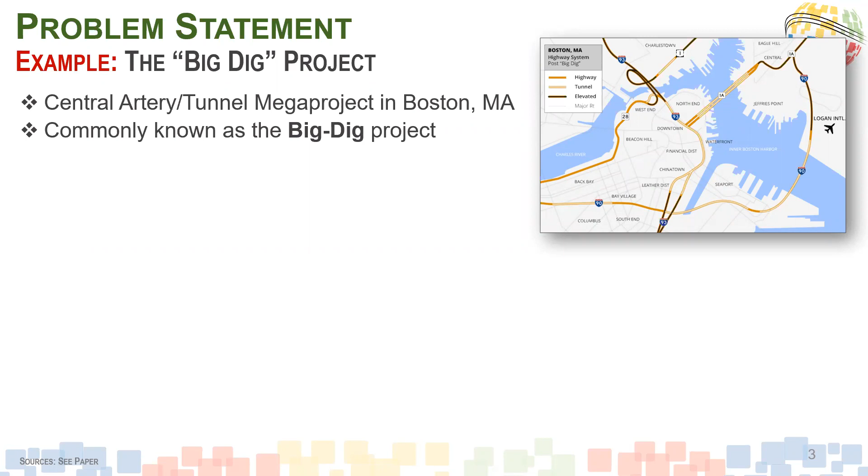In this case, I'm using the Big Dig project - basically the Central Artery Tunnel Mega Project in Boston, commonly known as the Big Dig. It was designed and built between '82 and 2007 - it's always good to use something in the past, right? Basically what it did is reroute Interstate I-93 from going through the heart of the city into a tunnel, and there were actually several tunnels involved. At the time, it was the most expensive highway project in the US, and in 2020 dollars it would have been over $20 billion.

And it actually had a number of issues, right - thousands of water leaks, design flaws, charges of poor execution, use of substandard materials, and other issues. Unfortunately, what happened then is it led to the death of one motorist and criminal arrests when a 24-ton concrete ceiling panel collapsed into a car. This is exactly what you see on the right. I'm providing a couple of sources and links if you want to read more about it.

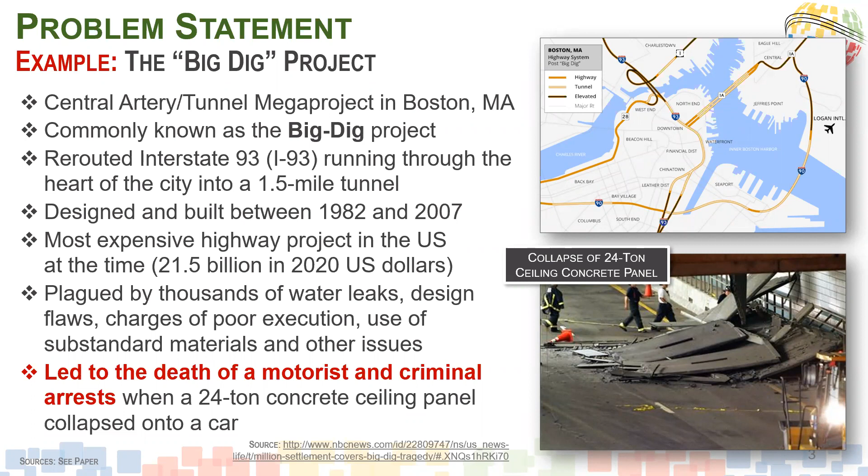Basically what happened is the companies that managed the project - and full disclosure, one of the predecessors of WSP was actually involved - had to pay over $400 million in restitution. Other, smaller companies still had to pay over $50 million. And basically what was determined in the settlement agreement was that there was basis for liability.

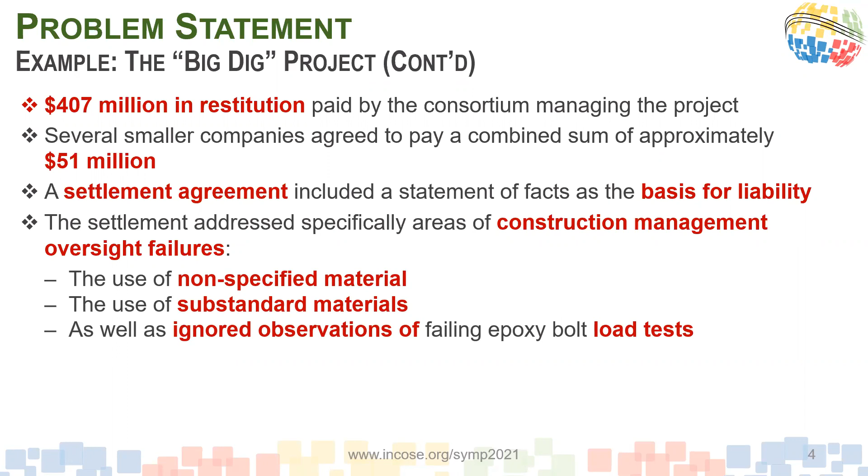Specifically, it was stated that there was construction management oversight failures in the areas of the use of non-specified materials, substandard materials, as well as ignored observations stemming from load tests, or failing epoxy bolt tests. All of those issues are typically addressed in so-called construction specifications, describing in detail the scope of work, materials, installation, and quality of workmanship.

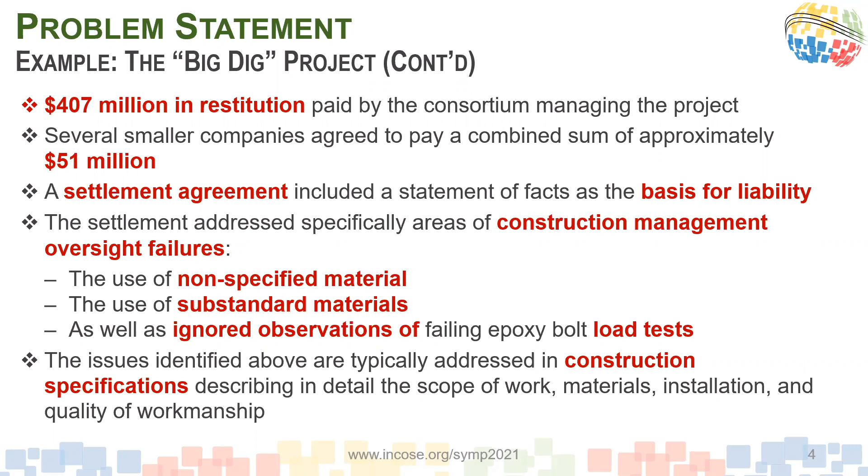While I'm using the word construction here, this is not only infrastructure. If you look in the U.S. transportation industry, even systems projects, they use specifications - at some point called product or construction specifications. So this relates to basically everything that's being built in the industry.

So how can systems engineering help? First I want to define what the professional standard of care even is. If you look it up, there are different definitions, but basically it means you have a systematic exercise of reasonable level of care, diligence, and skill.

It's also important to understand 'reasonable.' You don't have to be perfect, but you have to work in a good faith effort trying to do the right thing. However, if you fail to adhere to the professional standard of care, your company might be at risk and subject to liability.

In my opinion, the big issues really are common requirements management and V&V challenges. So you had requirements from the construction specifications for certain materials that shouldn't have been used, certain tests being performed that didn't meet the expectations.

This should have been - I don't want to say easy, this was a big program - but it should have been manageable. What I'm saying is this could have been avoided, from my perspective, if a structured systems engineering approach had been used.

This presentation talks about the application of systems engineering principles to construction specifications in a large infrastructure project using a case study approach, and also presents the application of systems engineering as a systematic exercise of reasonable level of care.

By doing so, I hope I can convince at least some people that the value of systems engineering can really also be seen as a liability protection and risk mitigation strategy. And whatever systems engineering might have cost - people are very concerned about money all the time - I'm pretty sure it would have been less than $400 million.

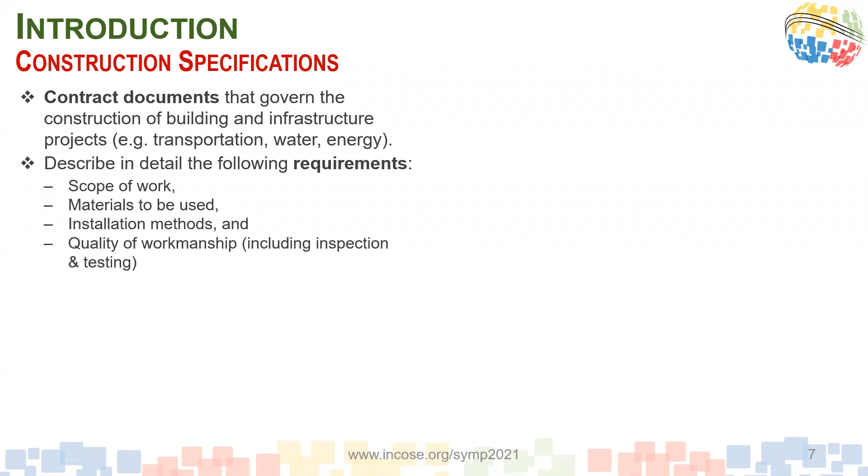Construction specifications are basically part of the contract documents that govern the construction of building and infrastructure projects. That doesn't only include typical infrastructure, it's also energy and water projects. They describe in detail the scope of work, the materials to be used, the installation methods, and the quality of workmanship. They are an essential component, one of three pieces of what the industry calls the PS&E approach: plans, specs, and estimates.

So you can see the plans - every industry develops a bit of a tribal language, right? But what I really mean is the drawings. Then the specifications are basically the actual materials and components to be used, and then the cost estimates.

Those specifications are governed by the Construction Specifications Institute, which has been around for decades. They developed what's called the CSI MasterFormat Standard, and they have 50 divisions. As you can see on the right side, I'll give you a brief overview of those divisions.

Everything in division 0 and 1 is basically for procurement and general provisions of procurement. For example, it talks about quality, scope of work, and submittals.

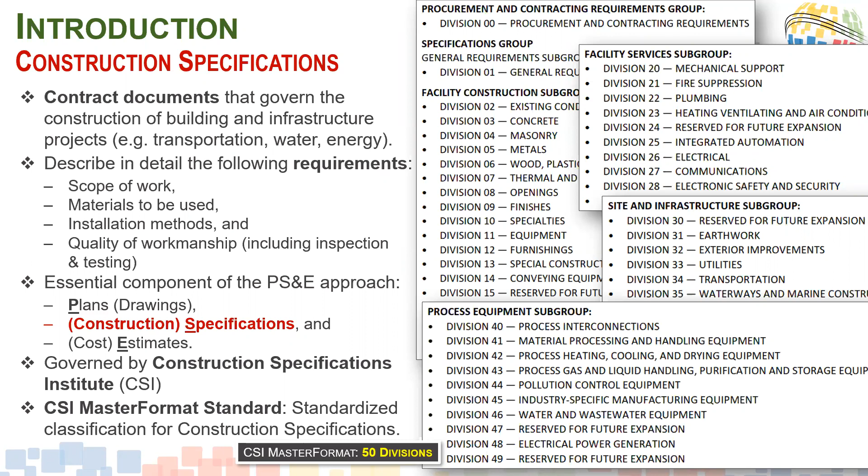And then everything starting with 2 all the way down to 49 is really all about the technical stuff. So let's take a look. I'm going to use this for the presentation only in order to keep it manageable. I'm focusing on a concrete specification.

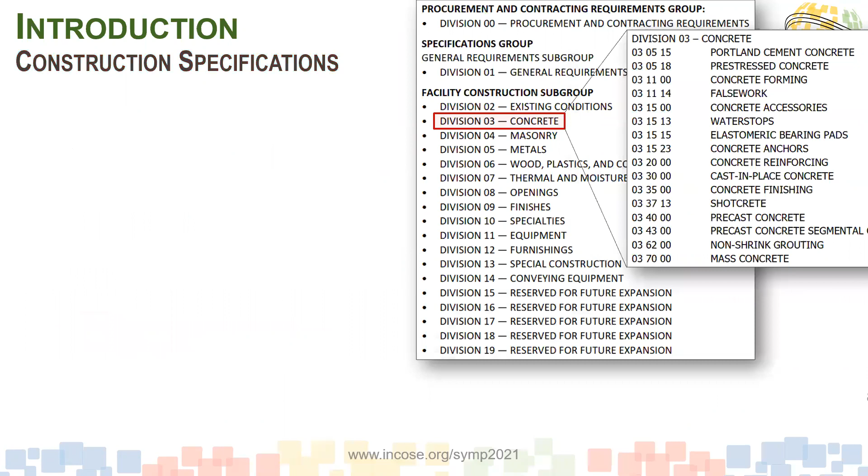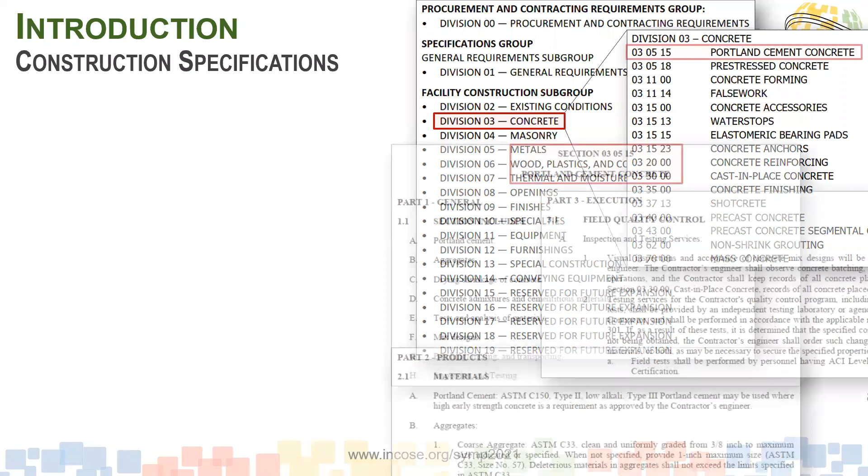So this one here is a Division 3 concrete. And if you take a look, this breaks down into so-called sections, which can be confusing because a section for me is normally something within a document, but every single one of those documents is called a section. And then within, we are focusing on the first one, the Portland cement concrete. And so this is how a typical construction spec looks.

So you have a general part, right? This is the one I'm highlighting here, and it typically describes managerial requirements such as applicability, work to be performed, codes and standards that apply, definitions, submittals as I'm showing you here, and quality management.

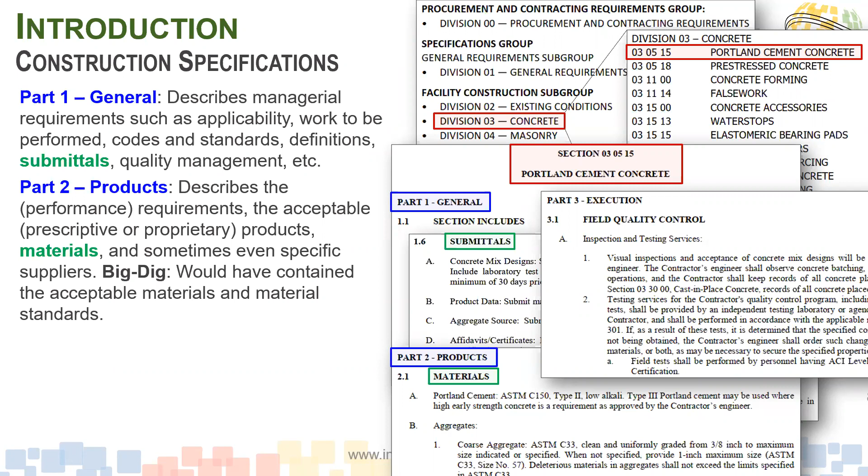So a lot of project management and general stuff. Then part 2 is the product, which actually talks about the actual things to be used. And depending on the type of delivery method, which I'm going to talk about a little later, it's supposed to be what's called performance requirements. The industry calls them performance, not to be confused with what systems engineers at INCOSE understand as performance. It means results-oriented requirements without describing the solution, or prescriptive, meaning the how-tos, the detailed or even proprietary products and materials. In the Big Dig, this would have been the section that identified the actual materials to be used, and I cannot imagine those specs did not specify exactly what was supposed to be done.

And then part 3 is the execution. That's really the work to be performed. Again, in the Big Dig, this would have identified the actual inspection and tests to be performed. And typically it covers all the installation, even up to the cleaning of a work site and so on.

And so I'm showing a couple of examples in here: the submittals, the materials, the field quality control, and even identifying certain inspection and testing to be performed. I'm going to refer back to this quite a bit. I just wanted to give you an idea how this looks.

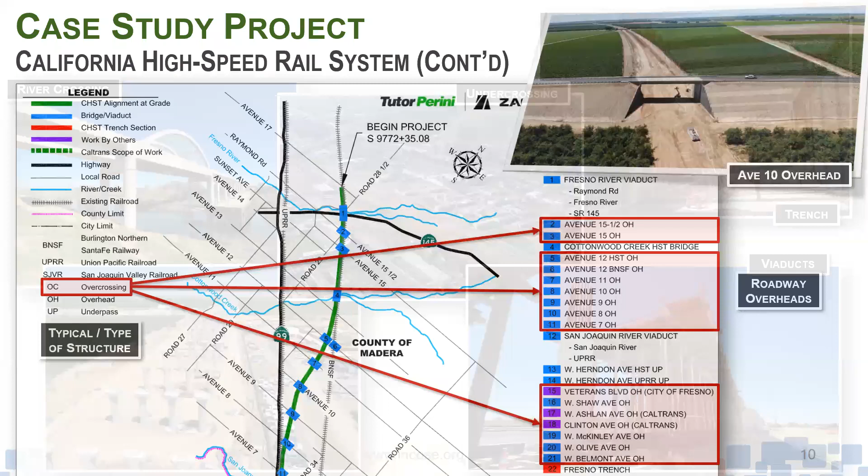And then what you see is we have quite a number of those — can you see it says Avenue 15.5, 15, 12, 11, 12, 10, 9? So basically we have quite a number of those roadway overheads. But those are not the only ones — obviously this is nothing more than almost like utility relocation. You want to get everything out of the way to build the actual train guideway.

And so we have river crossings, which we call a bridge. We have undercrossings — this would be the future station in Fresno, so we have roadways that go under. We have trenches, which is basically like a subway, only open to the top. Then we have viaducts down here, and you can see some of them are pretty large.

This is from CP3, by the way. And so in totality, we have over 225 major structures to be built, not only in CP1, but basically from CP1 to CP4, and they're being called quality milestones. Again, tribal language, but basically you just have to accept this is what it's called.

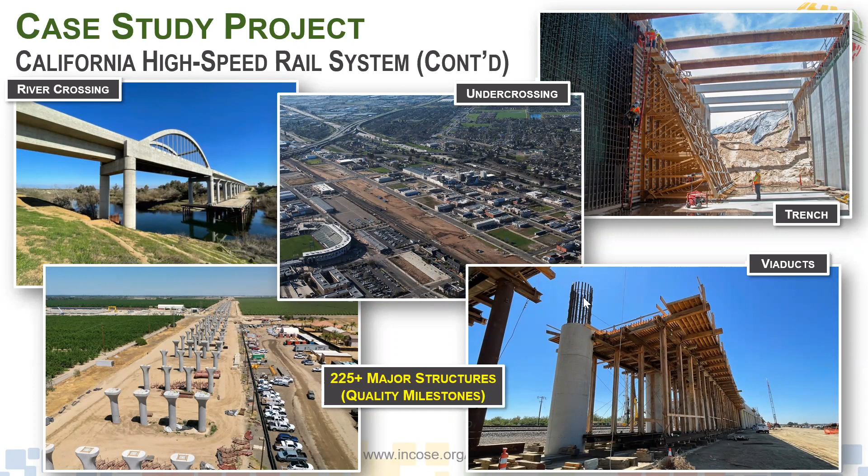Moving on, so this was just nothing more than the background. So let's take a look into the challenges we face.

First, what I want to do is describe quickly how the industry handles construction specifications. You can't really just jump in and say you should be doing systems engineering. If you don't understand how things are being done, you don't have any credibility if you want to propose changes. So let's take a look first.

So I talked about the delivery methods. This is really the life cycle, one of many, but the most common one is called design build. Basically, there's some planning effort typically by the owner or an agency, and then they typically hire consultants to do preliminary engineering, then they go to bid. You could argue this is some form of a 30% design.

And then either there's going to be another contractor, the actual contractor, and they typically perform the final design and the construction. Depending on the contract type, they actually also become responsible for maintenance or sometimes even operations. So then it would not be called design build, but design build maintain, or design build operate maintain.

This is typically on the so-called acquirer, in INCOSE language, or owner side, and this is typically the supplier or the design build firm. In the old days, all of the design was typically done by the owner, and the construction firms are basically responding to the final design.

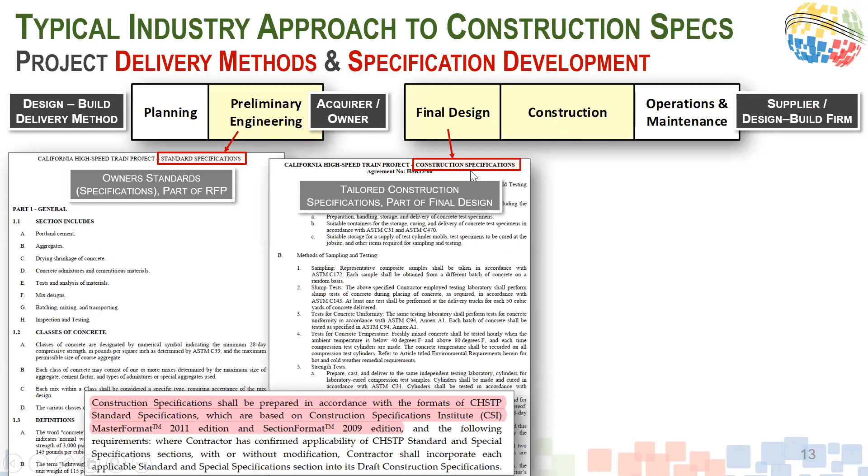Then during final design, the construction firm typically takes those owner standards and develops them into what's called the construction specifications. I want to show you this language actually from a contract, which says construction specifications shall be prepared in accordance with the format of the standard specifications, which are based on the Construction Specifications Institute, Master Format 2011. So those are the things I was trying to give you advance notice on in the prior slides.

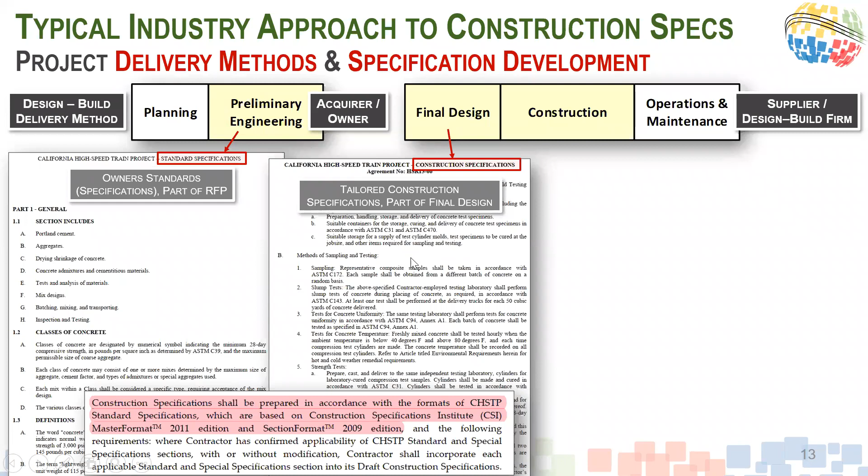Once the final design is done, this becomes an actual, it's called a ready-for-construction submittal, at the end of final design. Then during construction, the actual construction happens and many inspections and tests are performed. What we're trying to accomplish here is that whatever is demonstrated shows that it's in compliance with the requirements of the construction specifications.

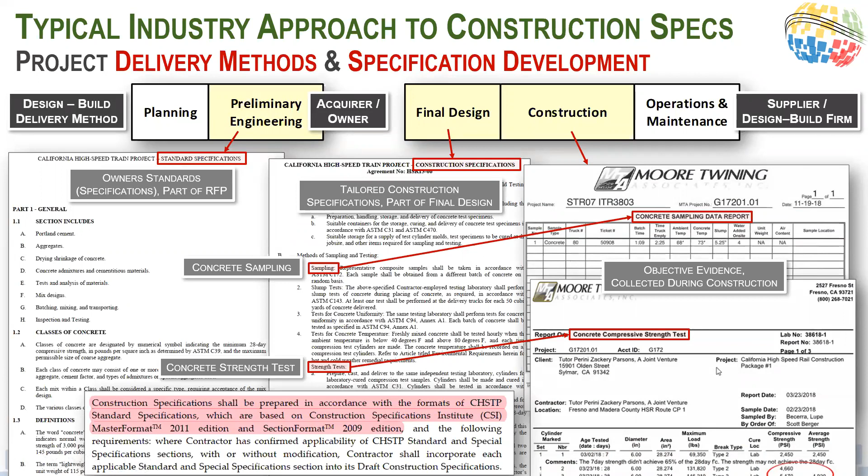So the whole industry is not really exposed a lot to systems engineering. If you use words like V&V, most people wouldn't know. So I'll show you why.

So here's the spec, Portland Cement Concrete. There's a section on quality assurance and control, and it says for contractor's quality management plan, include in the plan all tests the contractor will perform to verify compliance to the specification requirements.

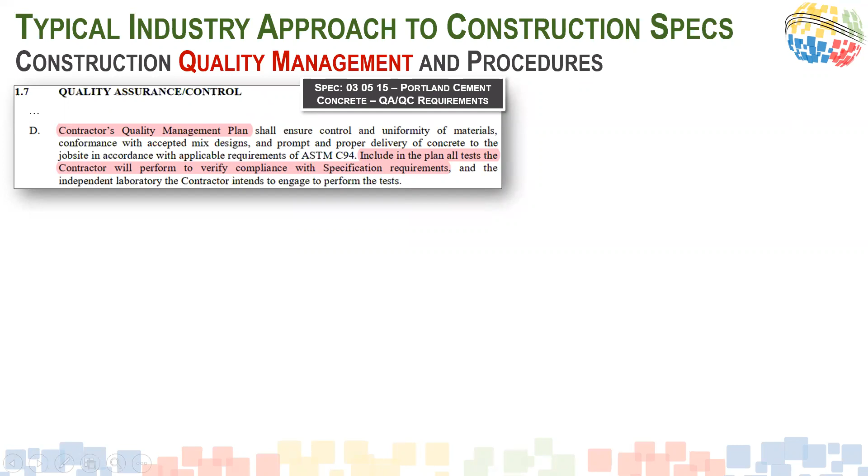That's typically what we know as requirements management and V&V, but in the construction world, it's quality. So if you say, hey, you should really do V&V, they'll tell you, oh, we're doing this already. And then basically what happens is, depending on the type of project, the contractors develop quality management plans, among many others. And quite often, because there's a separation between the design firm and the construction firm, you actually have different plans, one for design quality, one for construction quality.

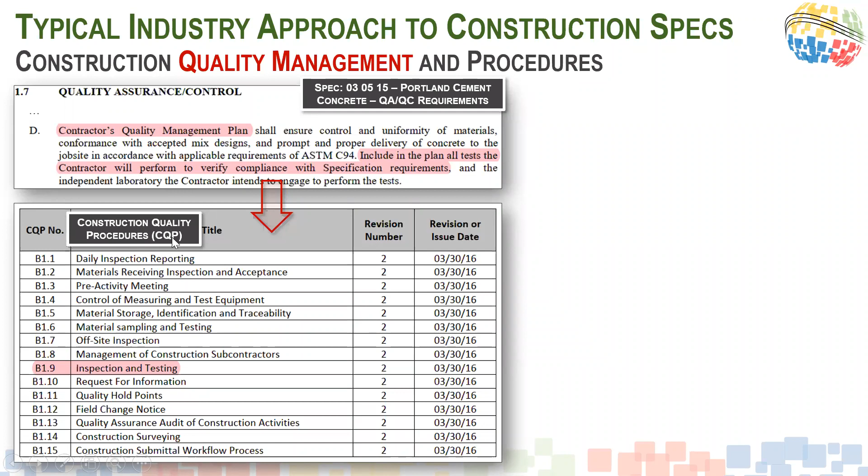So this is an example from a construction quality plan, listing so-called construction quality procedures, and one of them is inspection testing. If you go into those procedures, this goes into the details and talks about receiving material inspection testing, in-process inspection testing, and final inspection testing.

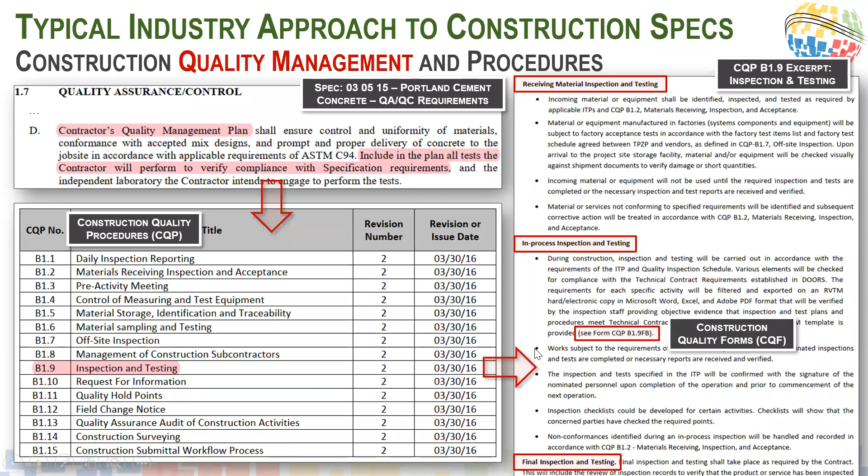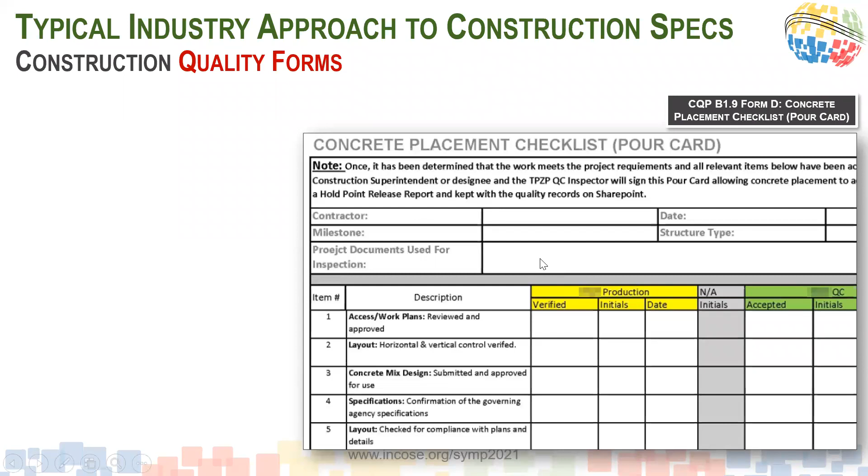Let me just show you one of those. It's actually the D form, the concrete placement checklist. So whenever concrete is being poured, this checklist is completed, and the checklist itself is based on the construction specifications. You see it would say concrete mix design submitted and approved.

And this goes back to the concrete mix design, which is basically one of the submittals to be provided. The mix design itself is one of the products. So basically this submittal would provide all the details of what kind of mix design is to be used, and then in the field, somebody would check it off as done.

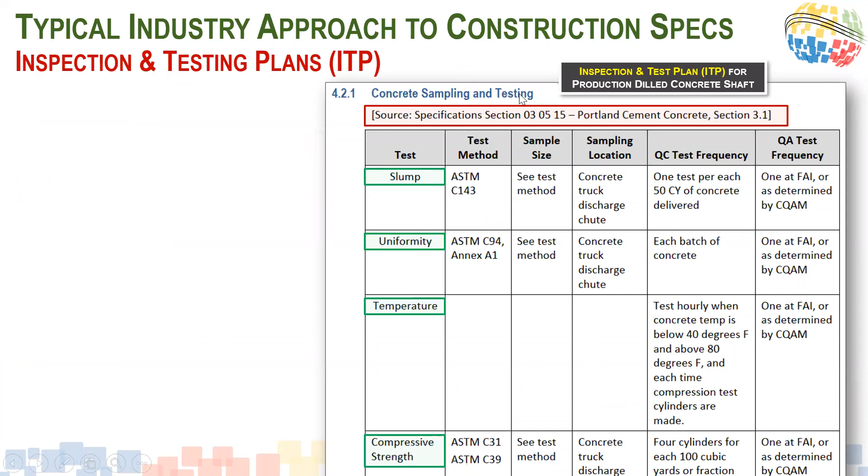And on top of that, there's inspection and test plans. This is one example here: concrete sampling and testing, and it even says the source would be this Portland cement concrete spec. All of these details come directly from the construction specifications. And then they go into further detail on what kind of test method is to be used, the sample size—basically more details on what the standard specs or construction specs say.

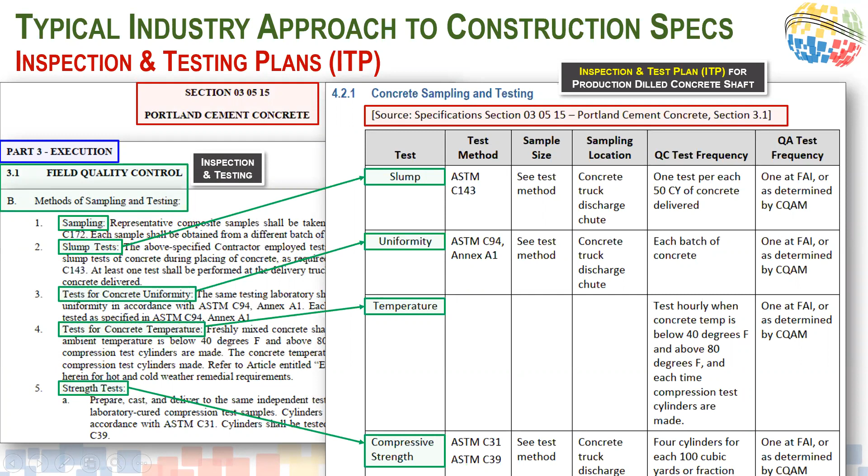And then at the end of the day, a lot of paper is being generated. For every single one of those structures, there's probably over 1,000 pieces of paper or pieces of quality records generated. For example, the subcontractor's daily report—every day somebody is providing a summary. Then there's the concrete mix design we just talked about, which is one of the submittals.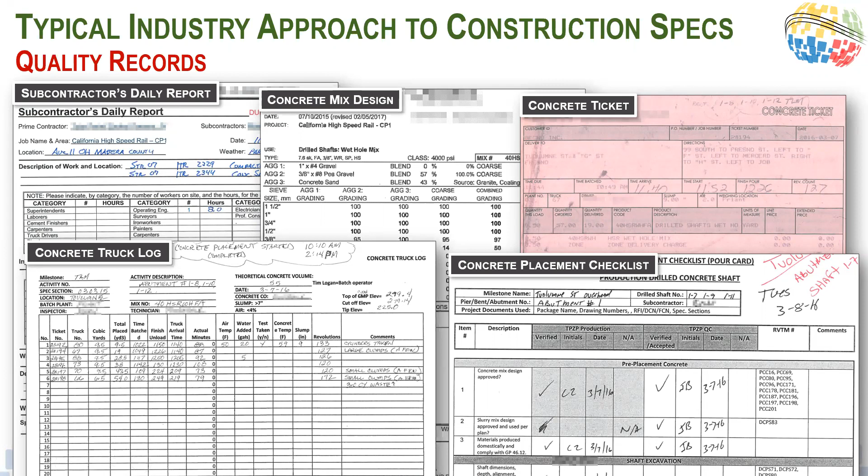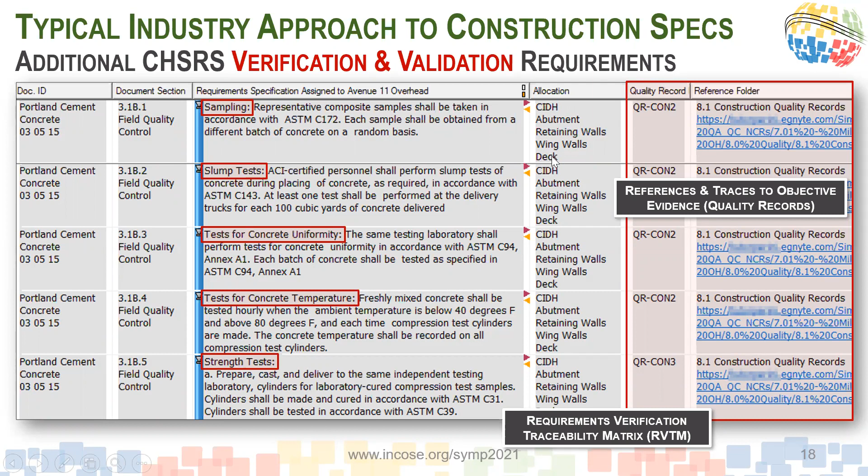Some additional requirements we have for high-speed rail: we actually ask contractors to perform requirements management using requirements management tools. To the knowing ones, I don't have to tell you which one it is, but what you see here is the spec again, and the section here talks about field quality control, the type of test to be performed, and then an allocation of whether it applies. CIDH stands for foundations, abutments are the walls of the bridges, and then the deck—and then which quality record is addressing it, even a reference to where this information can be found.

Anyway, so that's a quick overview, but I can't really jump in without giving that background information. What kind of challenges did this pose from a systems engineering perspective? Basically, translating—so I'm using only a few selected challenges, and only the ones in red I'm going into more detail. But first, there's a large number of contract documents and requirements, and also the applicability of all of those documents.

I'll show you in a second.

Meaning if you have a trench, a tunnel, an embankment, which of those requirements apply? Quite often the owners err on the side of safety and give you more than is needed instead of missing something, so there's a lot of information that doesn't apply. You really have to read through at the beginning and figure out which applies, which doesn't, and where exactly those requirements apply.

This isn't even about the quality of a requirement, it's just a pure amount of paper. And then there's different implementation by each contractor. I showed you we have CP1 to CP4, and because of design-build, a lot of responsibility is given to each contractor. They're different companies with different processes, so everyone is doing this slightly differently.

Then there's the submittals - there are thousands of them. We have 225 structures plus, and easily more than 1,000 for each. So we're dealing with easily 250,000 pieces of documents just for construction, not even counting all the other submittals.

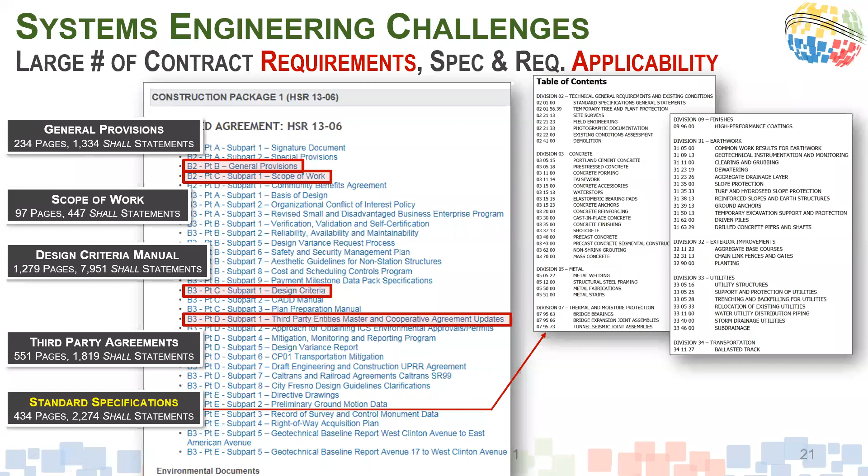The standard specs, which are supposed to be converted into construction specs, had 2,200 shall-statements, and when the dust settled it was more like 3,000 shall-statements. So with all of these, one of the big challenges with applicability is: how do we manage this, and which of these thousands of requirements apply to, say, Avenue 10?

I'm using this one because it was one of the first to be completed and certified.

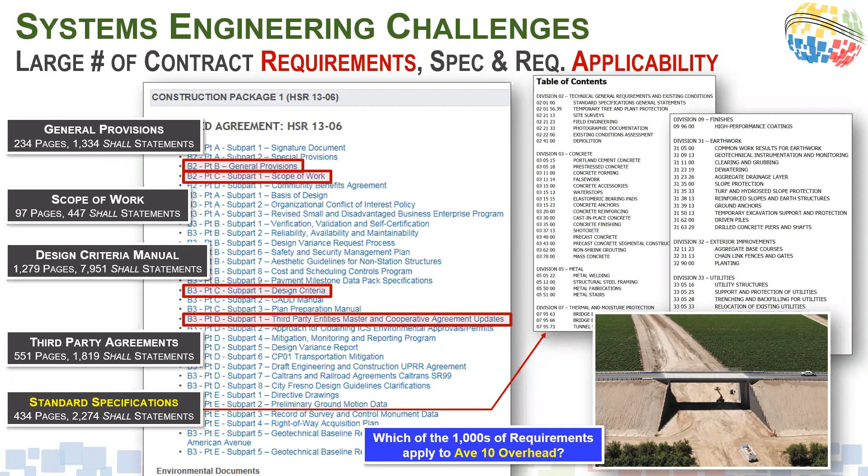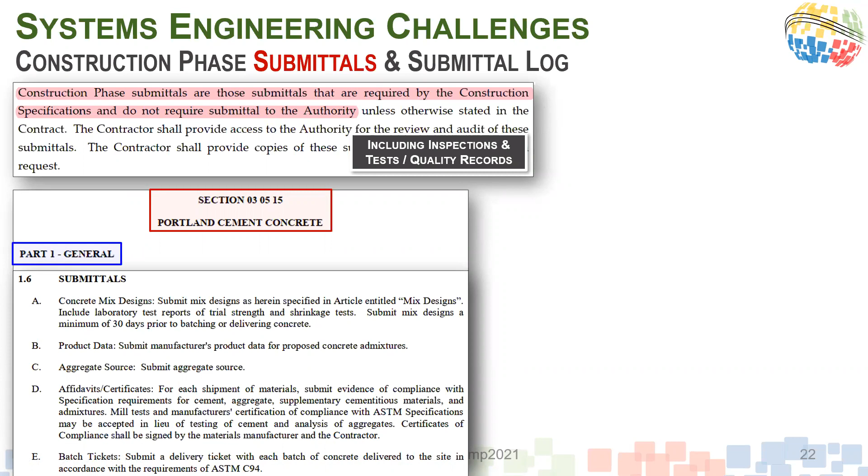So these are the specs - this one is general submittals. All of these, with the exception of certain ones, unless required, don't have to be provided; the contractor just keeps them accessible, more or less.

If you take the famous concrete mix design as an example and go to the submittal log - this is just one contract - this is how it looks. This is a filter view just looking for concrete mix. If you ask me which ones were used for a specific structure, I wouldn't be able to tell you. This one is for concrete strength, this is project-wide, this is for a specific roadway.

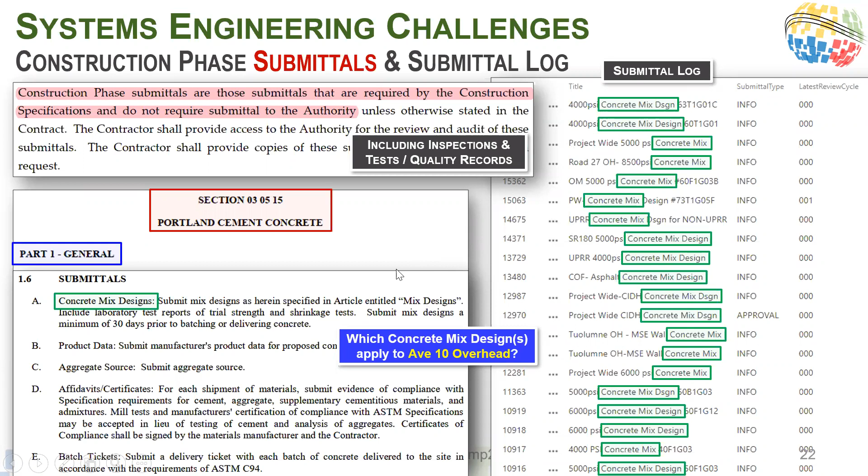I have no idea what this means - this is a third party, basically a freight railroad, and this is another roadway. The point is, it's very difficult to even understand which submittals belong to which type of structure. And remember we have tracing - so if I go in using one of the tests, say the slump test, you'd think okay, fine.

So this is Avenue 11 as an example. The allocation over here, it says this is a quality record. This is even the link, so I should be able to find it. Let me go and try, yeah?

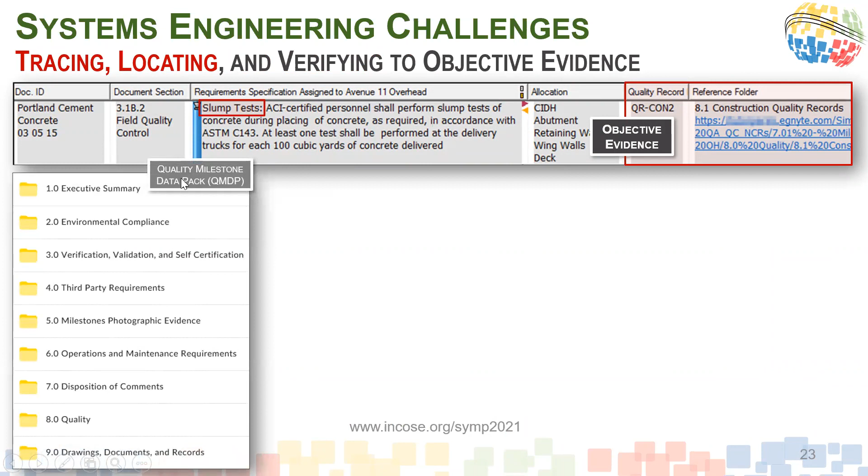So now for every one of those structures or quality milestones, as we call them, you recall there's a so-called data pack that has the following breakdown structure. And in here, it says quality, right? So quality down here, and look at this: 8.1 construction quality records. So this is basically where this one is referencing to.

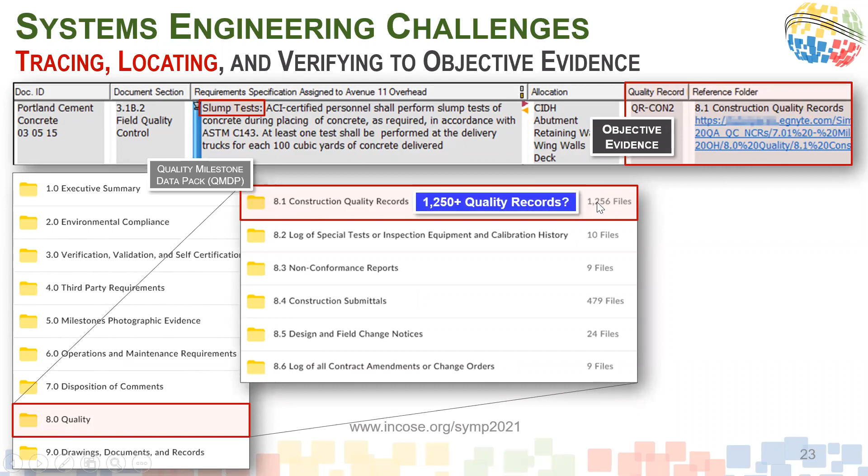But if you take a look, it says 1,256 files. And once you start digging, there's many, many subfolders. Oh, actually, I should say this is obviously what was before, yeah? So these are the challenges that we face. And so now you see these files in there again, over 1,000.

And then you say, okay fine, this was a record, let me take a look, right? QR stands for quality record, CC, CC, CL, no. Oh, there's a quality record. Oh, it's Con1, right, for concrete. Oh, here's one, concrete 2, that's 2. And there's actually more, yeah?

But once you open them, the first thing you're looking at is the contractor's daily report. And it's not the slump test. So maybe it's in there, yeah? But the point is, at this point in time, you almost forgot already what you were trying to do.

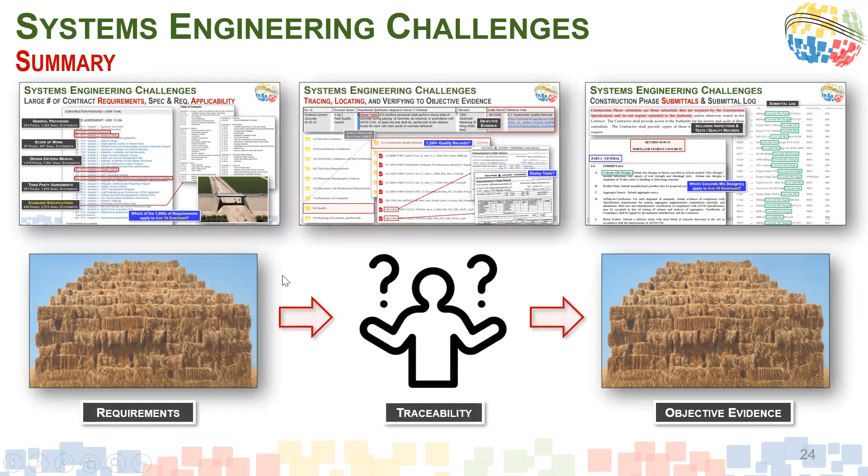So I should also mention that we are working on the oversight, making sure that the contractor is actually doing what they're supposed to do. And long story short, it was really difficult, right? So first we dealt with a huge amount of hay, as I like to call this, gazillions of submittals. We have tons of requirements in here, right? And the traceability, it did not really give us a good picture.

So long story short, this was all about 24 slides or so, just to give some background and the problem statement. So what we were trying to do here, our objectives.

So first, what we're trying to do is address the systems engineering I just talked about, basically determining the governing specifications of which specs apply and which requirements in each spec apply. Then analyze and allocate the requirements to individual milestones like the trenches, bridges, you name it, and even within the elements like foundations, the columns, the deck, you name it.

And then bring some structure to the quality record storage system that is suitable for the large amount of records, and then provide traceability, right? Like almost a 4-step process.

And then also what we wanted to do is demonstrate the professional standard of care by having a systematic process. And even if, truly, you make honest mistakes, you can say, look, this was just by mistake, and we didn't really want to subject us to liability, so to speak. And then also, obviously, avoiding the cautionary tale of a Big-Dig scenario.

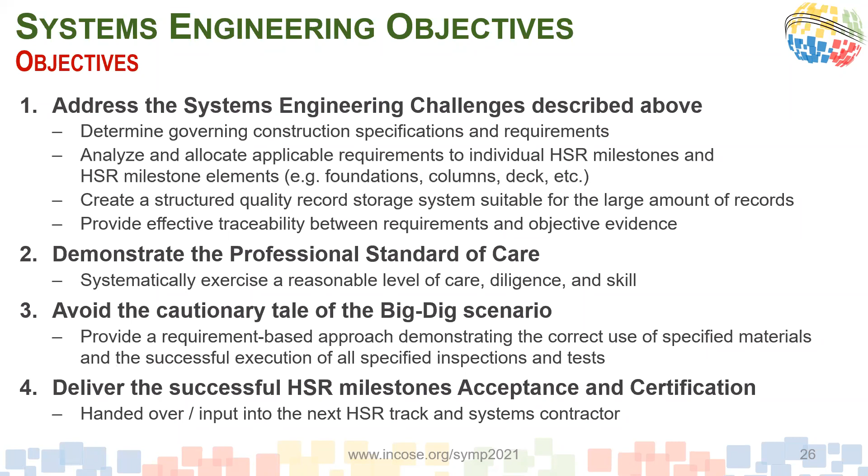So we really wanted a requirements-based approach, demonstrating the correct use of the specified materials, but also making sure that all the inspection tests had been performed properly. And then obviously, once we accept all the infrastructure, this is not the end of the story. This is when the real fun begins, by putting track on the structures, buying trains and installing the signaling systems. So we want to make sure that the handover is going smoothly between the infrastructure and the systems contractors.

And so also what we wanted to do is we didn't want to go in guns blazing and say, hey, stop everything you're doing, we have a much better way. We wanted to be very considerate.

So as I showed you, the construction industry uses the plan, specs, and estimates approach. They use the CSI master format. They have a GDP which is like $600-some billion a year, over 7 million employees. And they're so used to the construction specs, you can't just go in and say, oh, you should really use like an IEEE standard for requirement specs. That's not going to happen.

Yeah, so you have to consider working with the construction specs over there. Then you speak the language, obviously, of your client, right? In this case, continue using the quality management language. So even though we have V&V requirements, it's widely unknown.

So basically, just consider integrating the whole quality management system, including the plans we talked about, the procedures, the forms, the inspection test plans, the quality records. Basically, just use what we have.

Also, every time you go in with a design build contract, fixed price, low bid contract, and you give specific directions, or say do something different than what the contract says, or possibly even more, you potentially have a claim at your hands, meaning more work, more money.

So basically what we said is, in order to avoid this to the degree possible, reuse as much deliverables that were already created, specifically the construction specs, all the quality documents, the submittal logs, the ITPs, inspection test plans, the milestone data packs we talked about. Basically, we didn't really reinvent anything, it was just reorganizing.

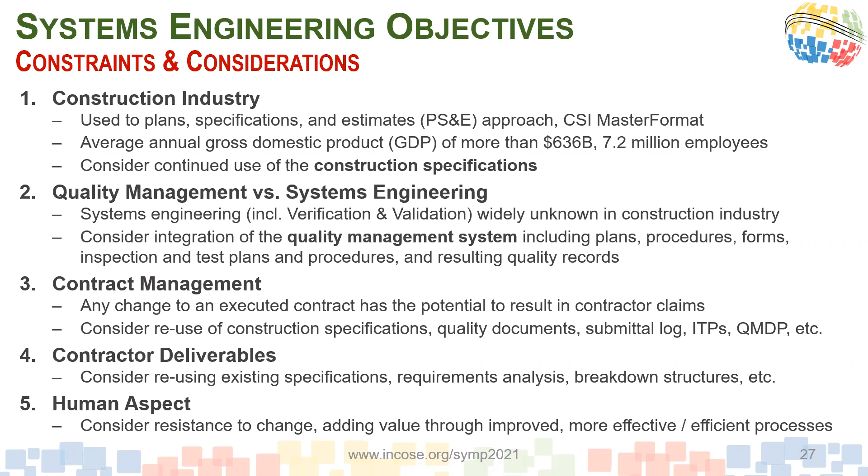Over. I'm sorry? Was that a question or just somebody not on mute? Yeah, it was someone not on mute. If everyone can please go on mute, please.

Thank you, so then let me go on. So basically we came up with a 4-step approach, right? This is what we had in mind.

So first we started with the contract documents, just requirements management, starting with the specs. And then use a breakdown structure from a contractor, and then allocate the requirements. So this is a construction package over here. And then basically do the V&V part by using folders.

And then basically those quality records will be placed in here. And then last but not least, we want to establish the traceability, from the specs all the way to the quality document, so to speak.

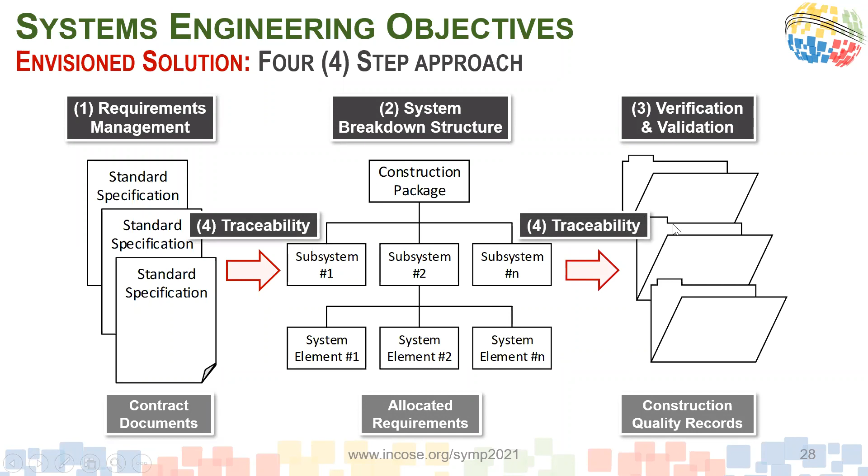And so I'll go now quickly into the actual things that we did. So step number 1, requirements management. The first thing we did is we developed what we call a requirements management model.

Starting out with the contract documents, basically we have the contract documents, and there's many others. I'm focusing only on the specs, starting out with the standard specs and the other specs as provided to the contractor. The second step, we went through and looked at which ones apply, which ones don't apply. Already we were taking out complete specs.

And then within those specs, we only focused on certain requirements, and at the end of the day we're basically eliminating 80% or so of the requirements already. And then we rolled them all over into what we call a master list of technical contract requirements. So we have, for example, all the managerial requirements we didn't even care about.

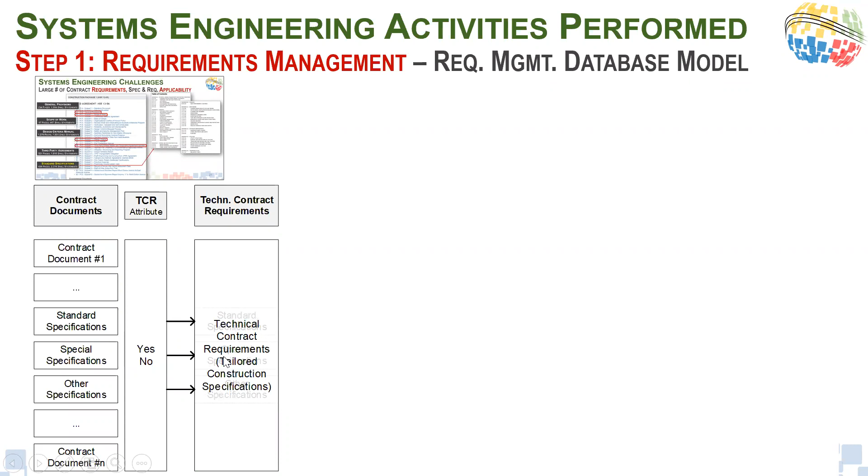And then at this point in time, the contractor would tailor those specifications to the project, becoming the construction specs. So here there are the standard specs, here there are the construction specs. And then we went the next step, basing on the different types, as I showed you earlier.

So now we start creating smaller buckets of requirements. For at-grade, that really means the embankments, or aerial structures means something like this. Trenches are over here, roadway overheads are the famous Avenue 11 I showed you about. And then even going one step further, the bits and pieces of each structure, foundations of the base slab, which is the bottom plate of a trench over here. Parapets are the concrete elements up here, and the subgrade is basically the dirt.

And then we also wanted to know, so now that we had types, so to speak, and then we had many applications of the type, these would basically be the sites. So for example, you have Avenue 11 as a roadway overhead, you have the Fresno Trench as a trench structure, you have Fresno River Viaduct as part of an aerial structure, and there were so-called guideway packages.

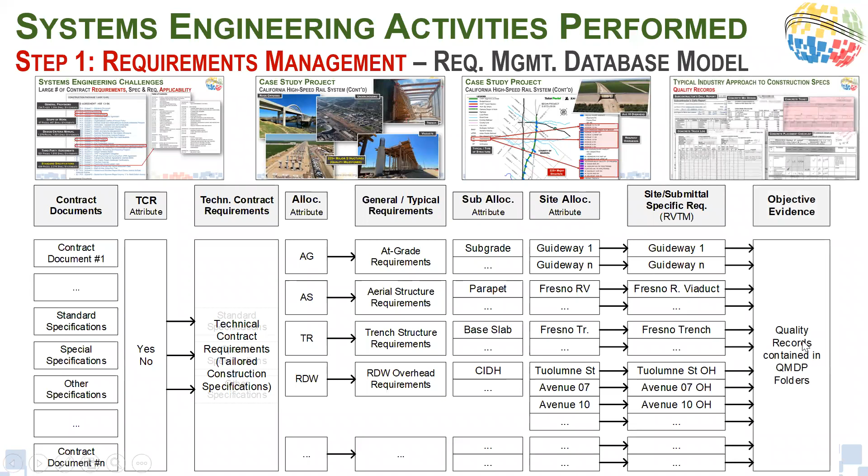And so once the requirements were trickled down, then we could take those and create our famous requirements verification traceability matrix, which basically contained only requirements applicable to one site, and then the contractor would have to provide references to traceability to the objective evidence demonstrating that those requirements have been satisfied. And they could do this by using the existing quality records, in the famous quality milestone data pack.

So just to give you an example of what we did, we started off with 65 specs in construction package 1. Then already, at the time of the construction specs, that came down to 40 specs. The roadway overheads were only 17 specs, and even the foundations were only 6 specs. So this is basically what this means: you start off with many requirements, and then it becomes only the applicable ones, and even lesser applicable depending on the type, and even more depending on the system element of the type.

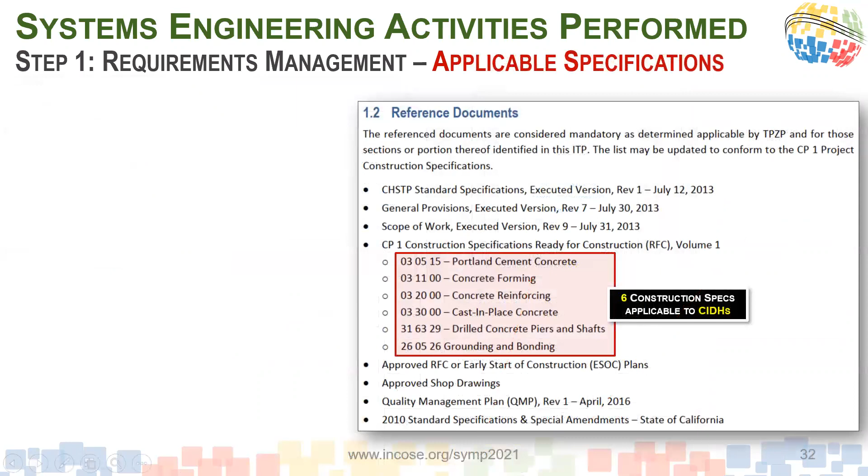And then how did we know that we had 6? So if I'm going back here, those 6 for foundations, well, we used again the contractor's own information. They had their own inspection test plan, as we talked about here. They're saying these are the specs that apply. So we were always trying to just use what was there, and if we agreed, we would just be fine with that.

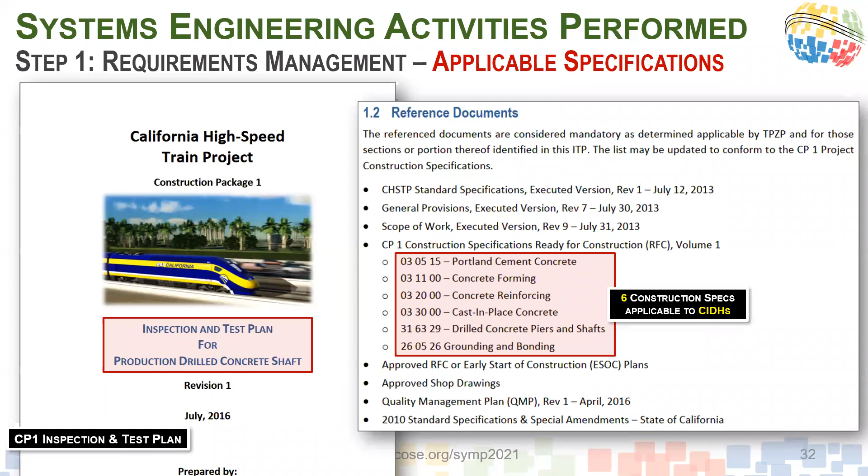And then every single spec now, if you open this, this is now a requirements management tool. We only focused on the things that were close to our heart. So you probably remember we said we wanted to make sure we use the right materials and all the tests are being performed, and this is called field quality control. Again, the industry is focused on quality instead of V&V. But it talks about, for example, strength tests in here, and obviously everything that is related to the submittal, like the concrete mix design.

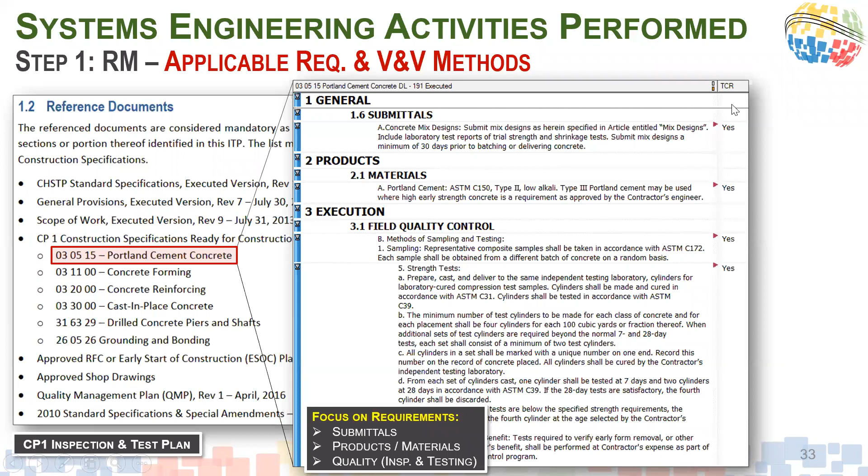So as I said earlier, by focusing only on these requirements, you can see we already skipped everything from 1.1 to 1.5. We were able to shrink it down from roughly 3,000 requirements to about 600. And this is the famous attribute we're using in the tool that says this is a technical contract requirement.

And then for every single one of those, we actually created what I would call a test case. So we created one file for each of those remaining requirements. For this spec, it was about 30. Can you see that the file name is basically derived from the spec itself? It says 1.6 submittal, so it would say 1.6 sub, and then it would say A, concrete mix design.

Take a look at this one, 2.1 materials. This one would say 3.1 field quality control. So we wanted to make this as intuitive as possible. And so now we took all the specs and created basically estimated test cases, so to speak. They were initially empty and had to be populated by the contractor.

And then the second step, the breakdown structure. Again, we used what was already there. So this is a roadway overhead. If you can see, this is actually the high-speed train tracks. This over here is the embankment. This is a different roadway over here. And I'm using Avenue 7 because this one has so-called bents.

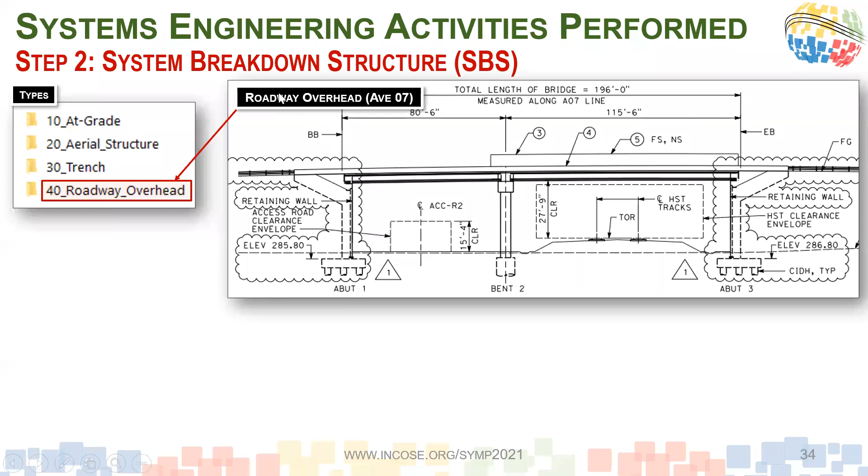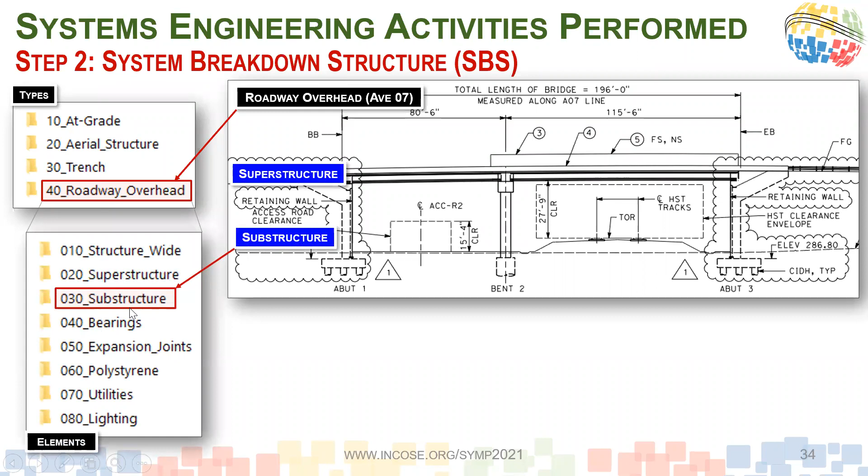But the point is, this is now a roadway, a typical roadway, which is one of the 4 different types we talked about earlier. And then a roadway breaks down into the superstructure, the substructure. Can you see the naming convention over here? And then the substructure itself breaks down into the abutments, which are the walls of a bridge, then the pile caps, those are those concrete thingies over here, the columns, the pier caps, the CIDHs, which are, can you see it says CIDH over here? Those are the foundations that go into the ground.

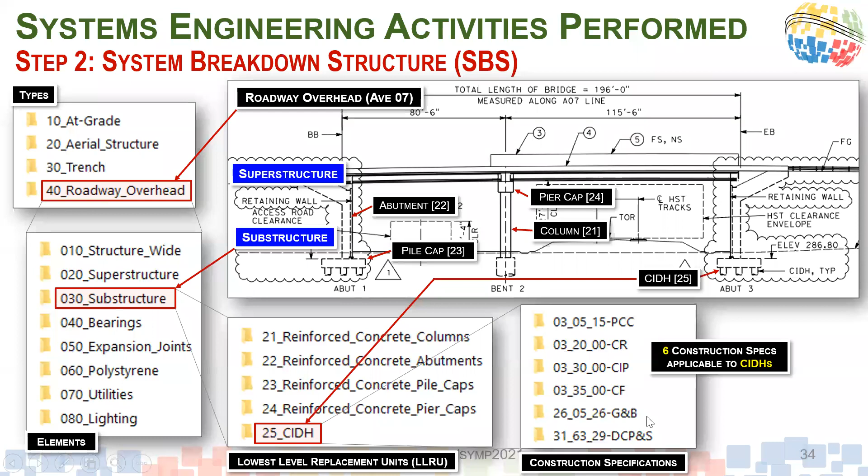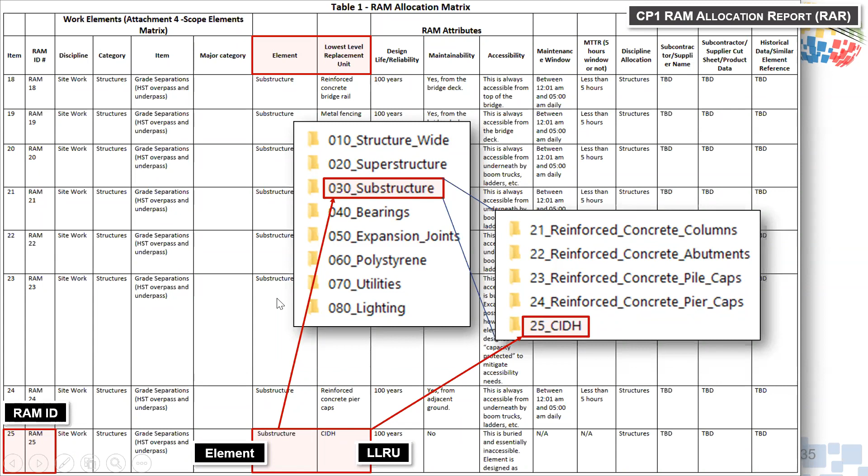We already established that this foundation had 6 specs to apply. And again, we didn't just make the stuff up - we used what was available. There's a so-called RAM allocation report the contractors had prepared, and this breakdown is taken directly from the contractor's prior work. For example, it says 25, this ID, and then substructure, CIDH. So we basically created this list into a folder structure, so to speak.

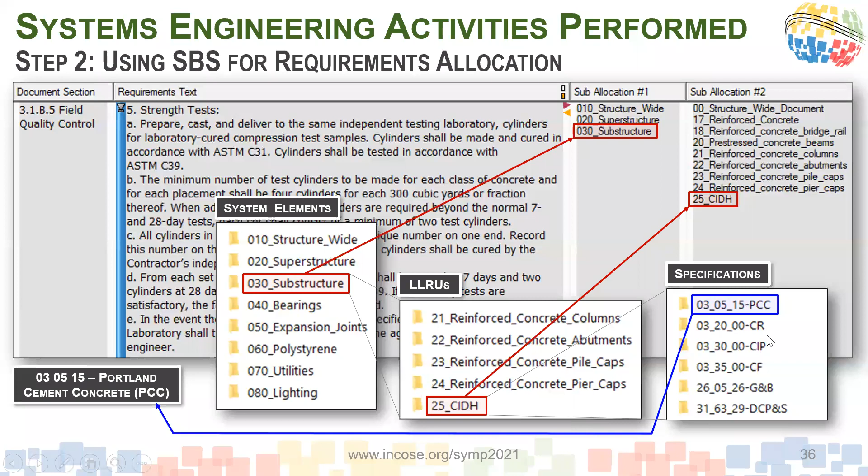We used that same breakdown structure to allocate this to the requirements. So this concrete spec now applies to the substructure, and applies to the foundation. We also knew, because this is for concrete spec, this is basically this piece over here. So we basically have all the information on the requirements management - we know the spec, we know the requirement, we know where it applies.

And then we used the same breakdown structure to create a folder structure to store all the quality records. Again, when I say we, this is basically what the system we developed did. We went to all the 3 contractors and asked them to implement this - in this case we had to issue so-called directive letters. Quality down here, right? You remember this was the one with 1,250 some files.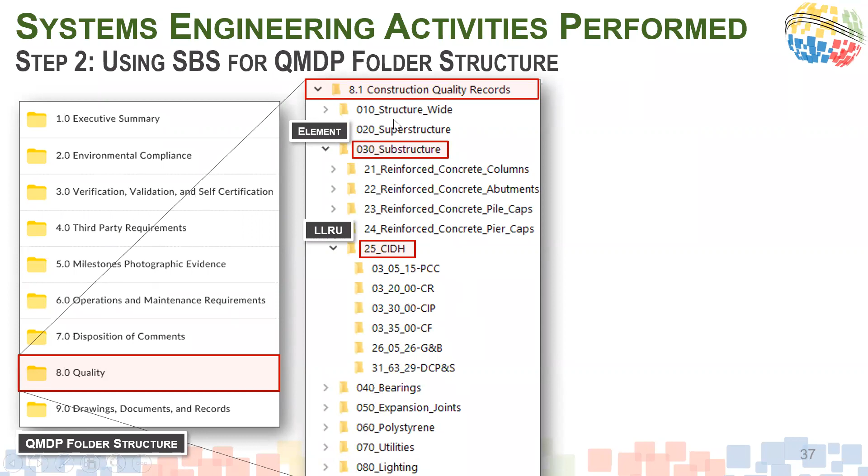So now what we have is a structure based on the breakdown structure of a contractor. In this case it would say substructure, CIDH, and then the spec again. This folder would contain all the files for this spec. And then step number 3 is the actual V&V effort.

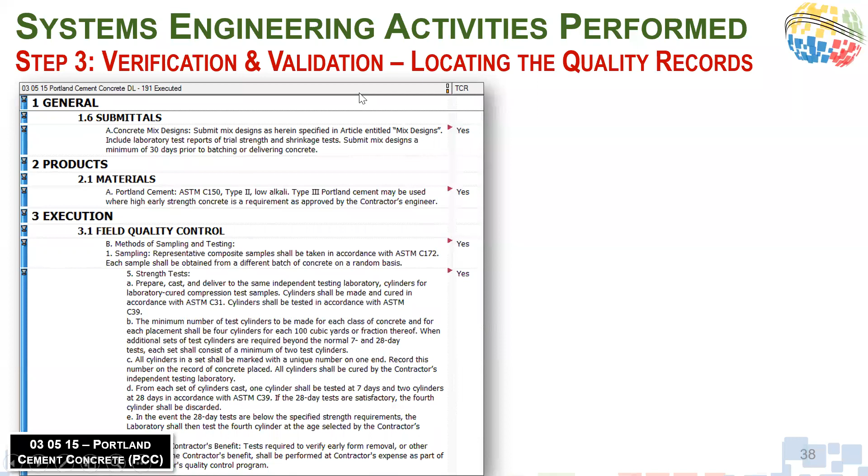First, as I showed you earlier, we had a tremendous difficulty to even find quality records. So the first step in the V&V process is to even locate the quality records. Remember the submittals - we had like 20 or so submittals of our concrete mix design, and then which one was it? So now we basically know this breakdown structure, the actual quality record system.

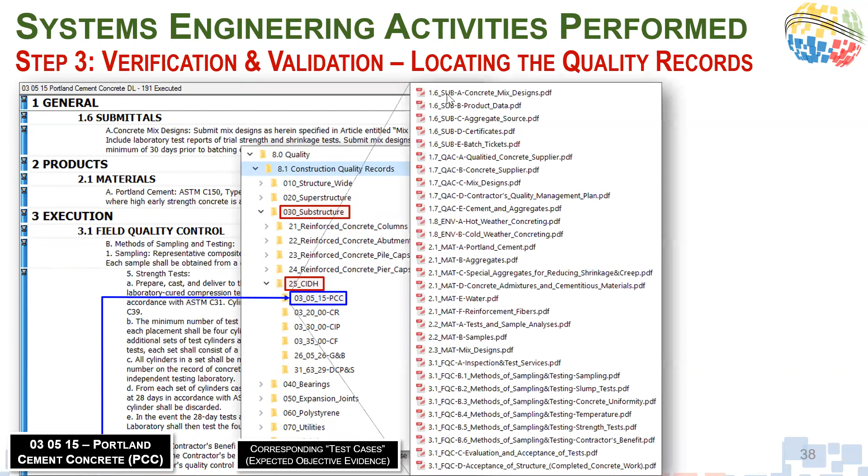If you go under substructure, under CIDH for this example, you go to the spec, you will basically find these records. If you open those records, the first one will say the concrete mix design - this will show in this record. So now you can say, look at this, this is the quality record that satisfies this requirement for the substructure and for the foundation. If you want to know the mix design used for the deck, you would go to the superstructure, for example, and that applies to all the different types.

You can now say, which material was being used? You go to the material certification, for Portland cement as a record. You want to know what strength test was performed? You go find this record - this is actually the one down here, and you're able to find this. Now that you're able to find it, you can start doing the actual review of the V&V effort, saying this was the offered objective evidence, and comparing this against the actual requirements from the construction specs - do we believe this meets the requirements?

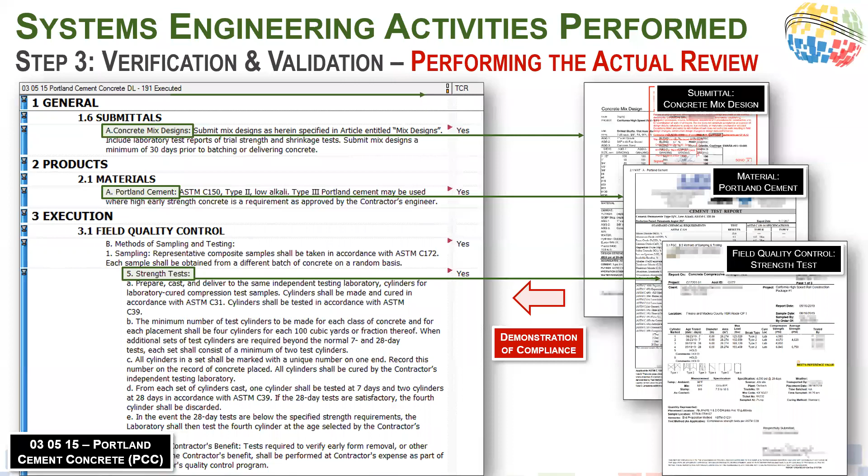And then last but not least, the traceability. We actually have 2 forms of traceability. One is directly from a requirements management tool - I showed you we had the allocations in here. You also recall that we have like 600 or so requirements, and many, many different allocations. So if you want to do this manually, it's really kind of a pain, I have to say. So we offer the contractors to automate this by providing certain scripts we can run.

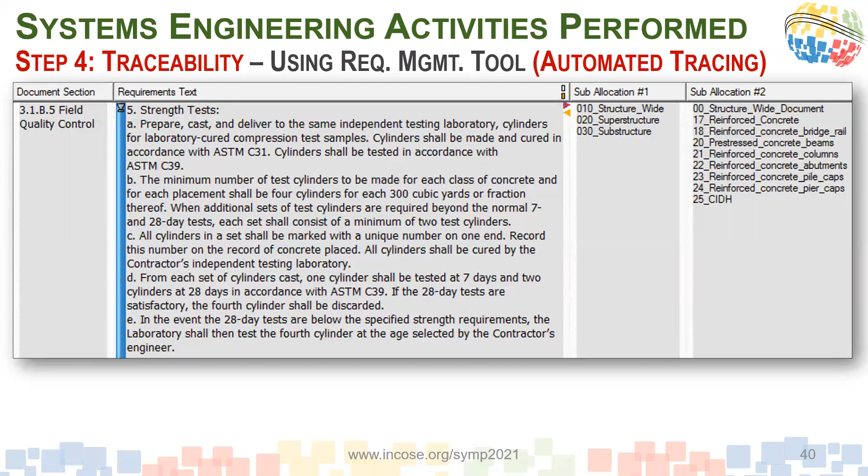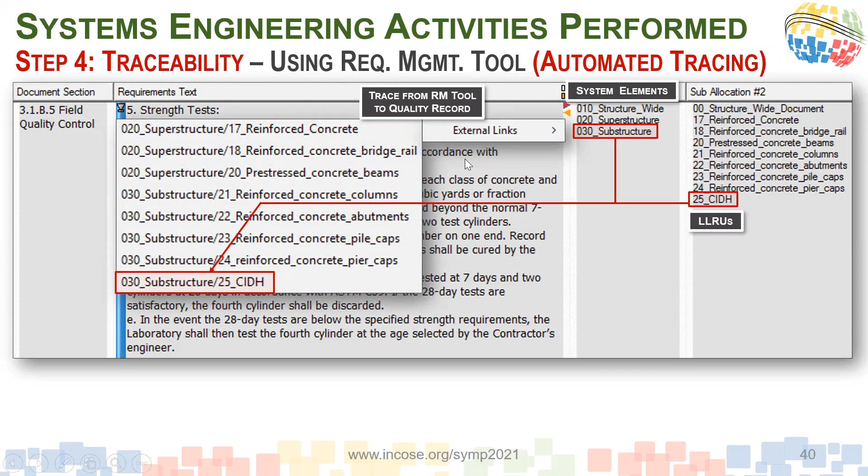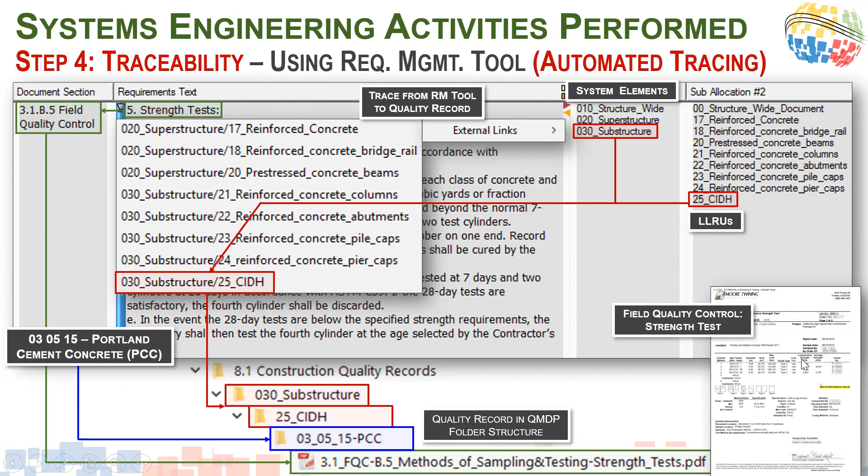Just to show you an idea, all the information you need is already in here. If you hover over the X-zone traces, as they're called, you will see this - a combination of the two elements, for example substructure and the CIDH. This is what it would show now. We already know in the actual folder system you would have a folder substructure, folder CIDH. Then we would know this is for concrete spec, so this would be the next folder, and we also know this is for a section in this spec - 3.1, quality control, the strength test. If you open this file, this would be the record you find. So now you can click on the link and this record would open. We were able to automate this and show that it works.

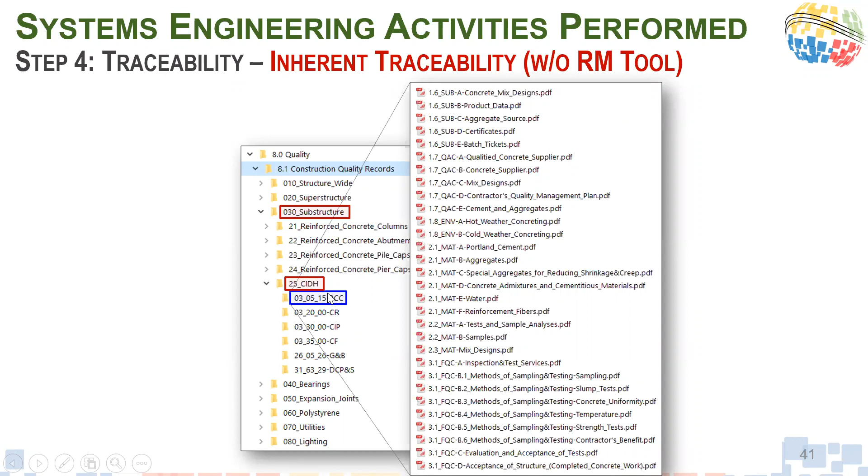But we also recognize that the industry is still not very requirements-heavy. Most people still prefer to just go and look at records. So they can do this now. They can go into the quality milestone data pack and say, hey, I want to know everything about the foundations, right? So you go to substructure, foundations, the concrete part, and this would be the reinforcement, for example.

Like the rebar. And you go in there and say, what do you want to look at? Concrete mix design, right? Great. So you get those records again, the same. But now if people say, I don't even know what I'm looking at anymore, does it meet the requirements? Well, this is where the naming convention comes in handy. You already have the section of the spec you're in. So all you have to do is open the actual construction specs, go to those sections, and refamiliarize yourself with the requirements.

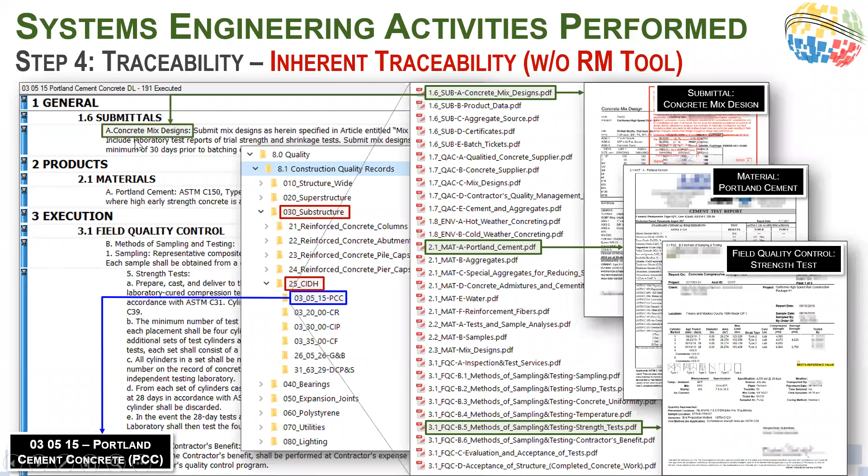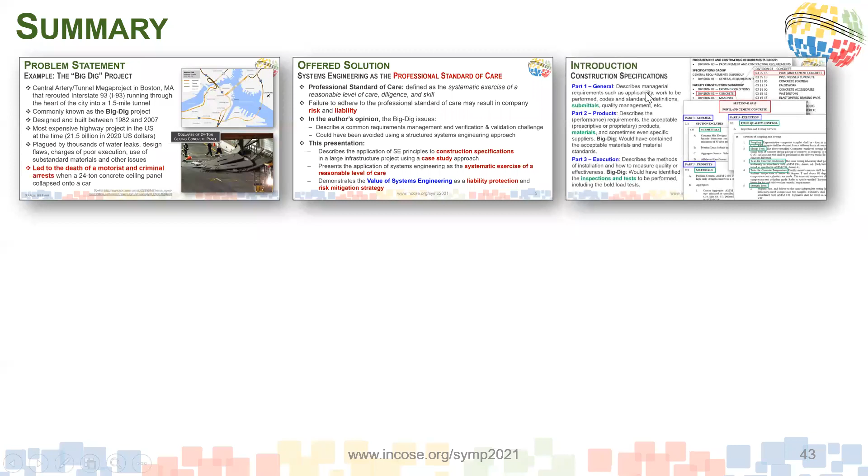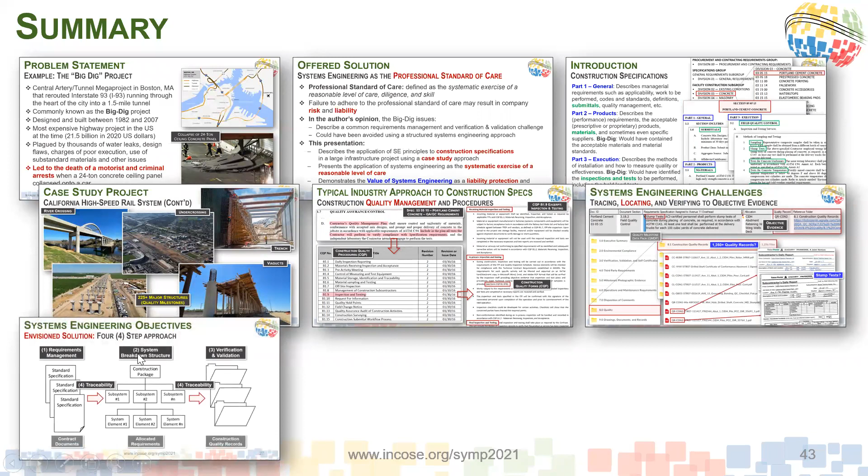Anyway, moving on, I realize I should hurry up. So just to talk about the summary here. I talked about why we are doing this - the big dig issue was really the trigger. I talked about how systems engineering can help as a professional standard of care. I talked about getting some background on the construction specs, the high-speed rail case study project. I talked about the industry, what they're doing, the challenges we were facing. And then I talked about our envisioned approach and how we implemented this with requirements and management analysis, and how we were able to trace to the actual objective evidence.

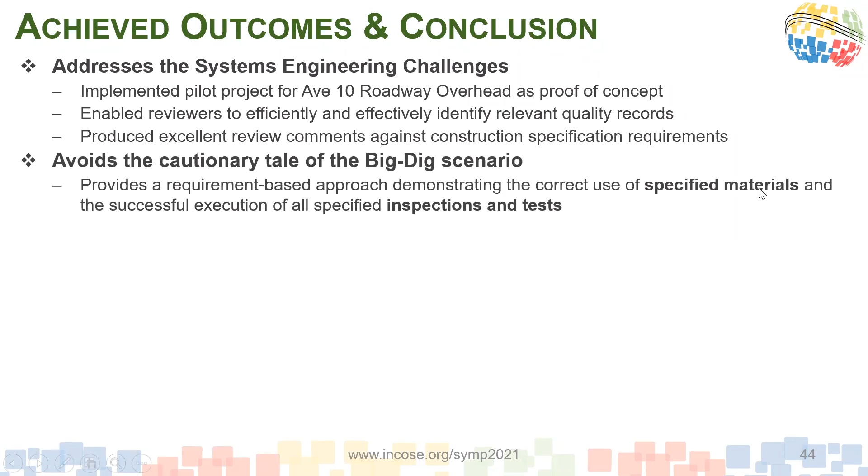So, quick achievements - we believe that was actually very helpful. It really worked a lot, because what was happening, we did this for Avenue 10 as a pilot template, and the reviewers were actually able to efficiently and effectively identify the quality records, which was the key challenge before, and that produced really good review comments showing that they were starting to review the objective evidence against the requirements. We also believe we can avoid the cautionary tale of the big dig by focusing on the materials, inspection and tests, which is included in the process.

We believe that with the confidence that we checked everything, we can accept all those milestones and certify, and then hand it over to the other contractors. We also believe we demonstrate the professional standard of care by performing a systematic exercise of reasonable level of care, diligence, and skill, and by doing so, demonstrating the value of systems engineering as a successful liability protection and risk mitigation strategy.

So that brings me to the end. Thank you for hanging in. Right, questions?

Actually, Oliver, I do. This is Alan here. I have a question, Alan Kwasi. So, very nice presentation.

My question is, when you look at your experience with this given project, looking at what did not work, do you believe it was mostly not knowing how to use systems engineering as a process, or more quality control and quality assurance in the field, or more document management and organization to find the right document, or more not using the tool properly, or more processes that were not in place? Because the reason I'm asking is that I'm trying to determine whether or not systems engineering was really needed to do the right thing. If quality processes and quality control standards were in place, and documents were properly organized and defined, do we really need systems engineering in this particular experience?